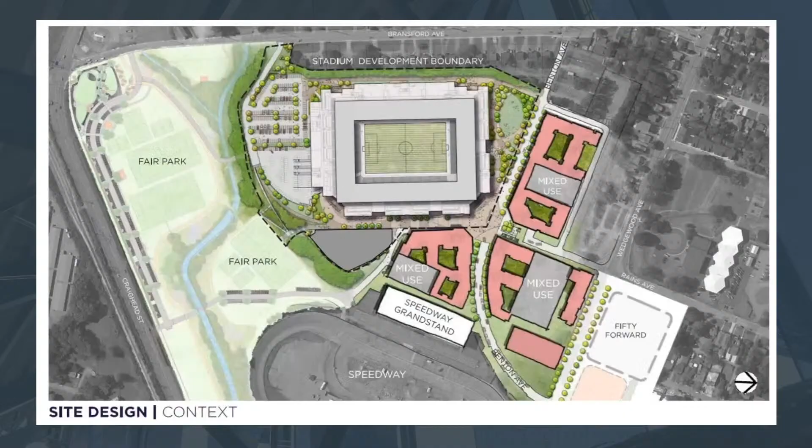Go to the next slide. So we're kind of turning directions here on you. That previous slide, north was up, so sorry for that. So north in this image is to your right. So downtown will be to your right in this image. So this is a closer in look at the project site. The project itself is located in the Fairgrounds Nashville area. This whole area has got a redevelopment plan that the stadium was a big part of.

The first phase of the project was the stadium. It sat on the grounds of some of the existing fairgrounds show buildings, exhibit buildings, and that kind of thing, and they were in desperate need to be replaced and redone. So this area was completely demolished, and the stadium was built on the site of that area.

As you can see around this area, there's other development going on, and the stadium serves as a catalyst for this development. There's mixed use development on the east side of the stadium between the Speedway and the stadium that is currently under construction. And then to the north, you'll see some additional mixed use development that will be developed in the near future.

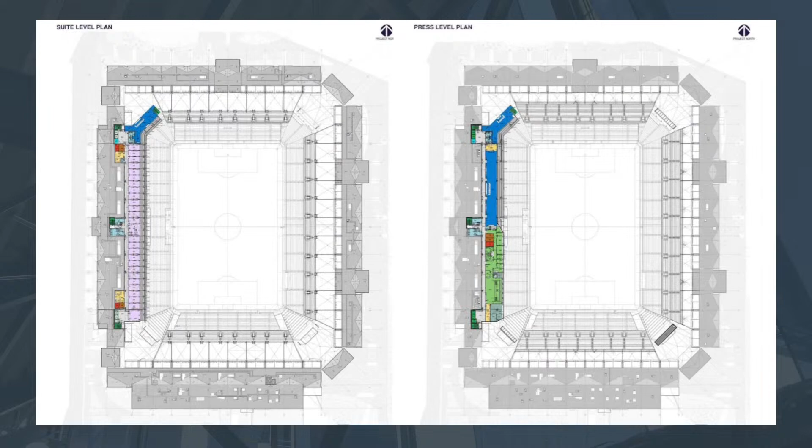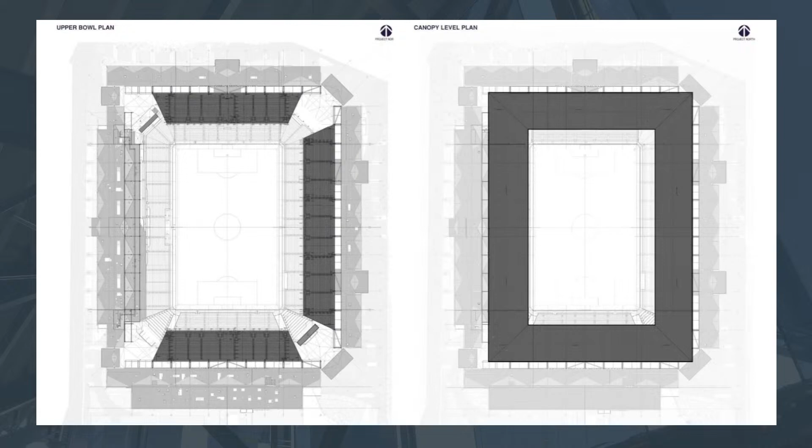And then the upper bowl plan, you can see how the upper bowl encompasses the north, east, and south sides of the field. And then the canopy level to the right, we have a canopy that circles 360. If I remember right, Justin, correct me if I'm wrong, I think that's over an 80-foot span on that canopy. Yeah, we're about 85 feet from the back of the bowl out, so it covers the entire upper bowl and a decent portion of the lower bowl as well.

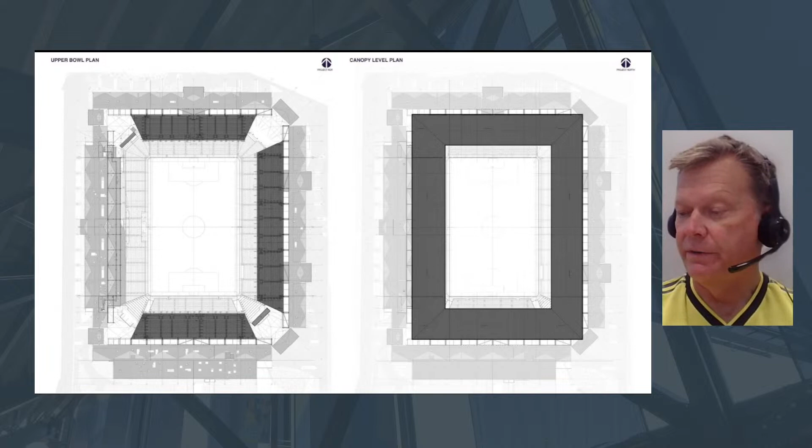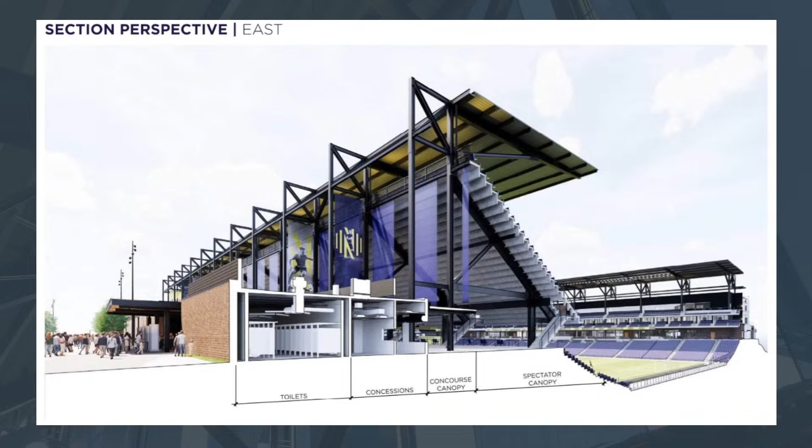Yeah. Some quick facts and figures. Opening day, May 1st. Project cost was about $285 million. Gross square footage for the building's right around 544,000 square feet. About 30,000 seats total. And the site acreage is about 19 acres. These next 3 slides that we're going to show you, I think, are very interesting and an important dovetail into our subject matter today. It gets into a little more detail.

So what we're seeing here is a section perspective of the east sideline, and what it does is it shows you a little more diagrammatically how the building goes together. You can see these outbuildings where the concessions and restrooms are basically simple buildings, all load-bearing masonry walls with bar joists. The main structure, as you can see, the tall verticality, we expose and express the structure. And this is a common thing for stadia design because it's kind of a magnitude of scale issue.

As these buildings get very large, sometimes we're just not fortunate enough to have the budget to completely wrap the exterior facade of these buildings. And so we express the structure, and it's part of the architecture. It's very important that as we get into our discussion today, you'll see the importance of what we want to talk about with steel design.

But going to this a little bit further, you can see that the upper bowl is all supported by the steel structure; the upper bowl is all precast. And then the canopy, as you can see above that, is all steel frame and steel deck and a single-ply membrane on top of that. Go to the next slide.

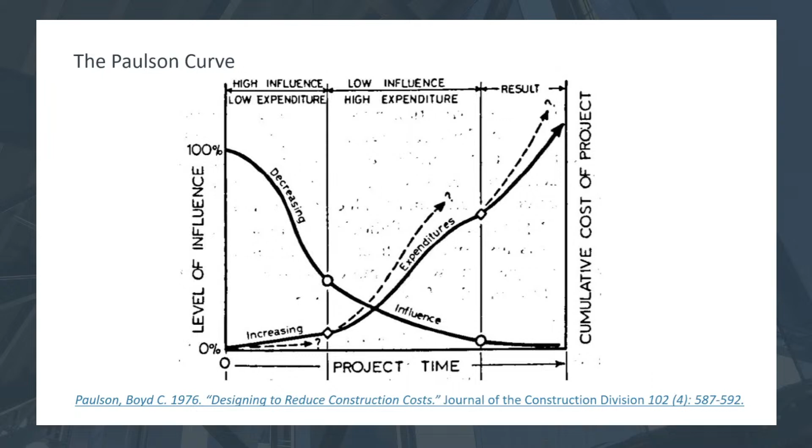So this was from 1976. Again, the same thing would apply to structural steel, going in that same manner. And really once those influence lines cross, that's the juxtaposition point. And really the project can go a variety of ways at that point. And the breadth of that cone really represents what we would refer to as the project risk profile for the owner. Things could go well, things could not go well. But again, we don't have as much influence over those factors as we do early on in the project.

So then thinking about that, is there a way to reduce that risk profile, to narrow that cone? And so in taking our influence line and pushing that forward, where we're actually going to spend a little bit more influence early on and pushing that out further into the project lifecycle, we can see that that's going to result in a narrowed cone. So overall, we're just trying to improve the influence curve to reduce the overall cost and schedule risk. And so, Taylor, you want to explain a little bit specifically about steel?

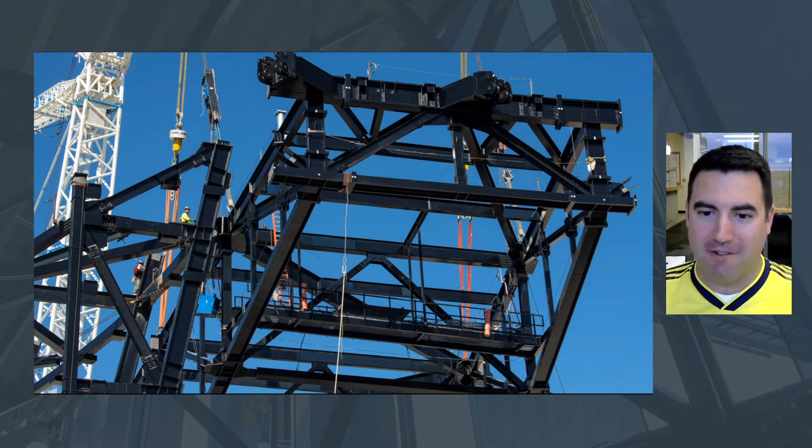Yeah. So, a couple pictures we'll walk through to support some of our descriptions. But historically, especially on sports projects, steel can be the single largest trade partner contract we have. It also comes with some of the highest risk, and a lot of that revolves around a few key components. One is simply the scale of the work and the fact that it lies on the critical path for the entire duration it takes place. So that's one key factor.

The other is really, to Bruce's point, steel structures have evolved. They're now just as much an architectural element of the building. They're no longer simply a supporting structural element. And so because of that, structures have become much more unique and ornate. It's incredible, but it comes with a challenge. And so the next image here helps to describe where the risk lies. The risk in steel typically doesn't lie within the body of the steel member. It lies at the connections, the last 5 or 10% of that steel member is really where the risk and the potential for a challenge exists.

And so with our project team here, our goal was how can we, to Justin's point, move some of these decisions and influence earlier on in the project and allow us to reduce the risk later on. We'll walk through how we actually brought this to fruition. And then towards the end, we'll drop through what worked and why we saw the success. But really, it was about managing risk for Mortenson, Messer, the owner, as well as the design team, and making those decisions early on.

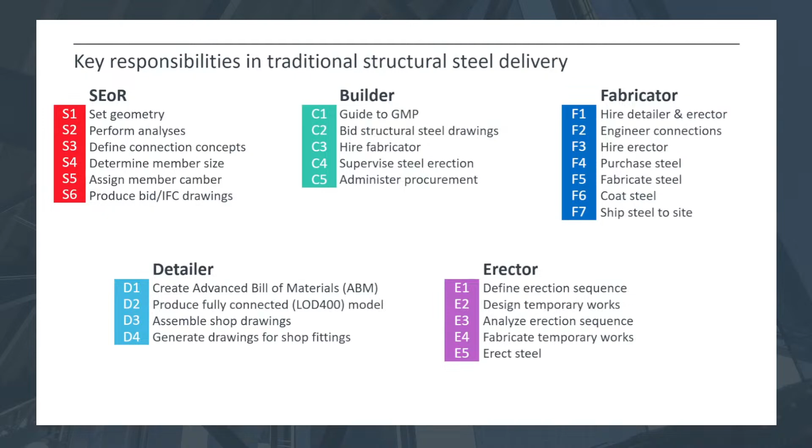Yeah, and one of the unique things about structural steel is that there's a lot of people and a lot of firms involved to get to that point where we're actually erecting steel on site. And the process is we have to create what's called an advanced bill of material. Every piece of steel is rolled in a factory and then shipped out to the project fabricator's warehouse to be able to start that fabrication process. But in order to create that advanced bill of material, it creates a lot of pull requests upstream. There has to be a detailer involved to help create that advanced bill of material.

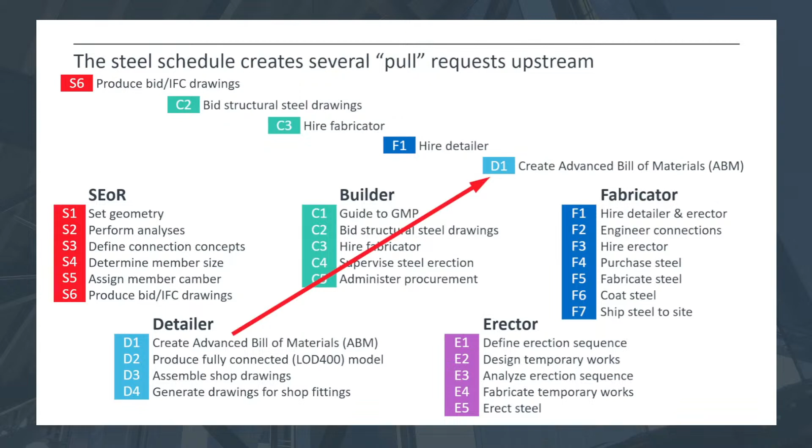That detailer traditionally has always worked underneath the fabricator scope. In order to have a fabricator on board, you have to bid. They have to be brought on board in some sort of environment, usually in a bid environment. And then in order to have a set of structural drawings to bid, the design team has to produce those, all to create that early mill order package for the project. So because of that, the need to start detailing created several of those things that happened early.

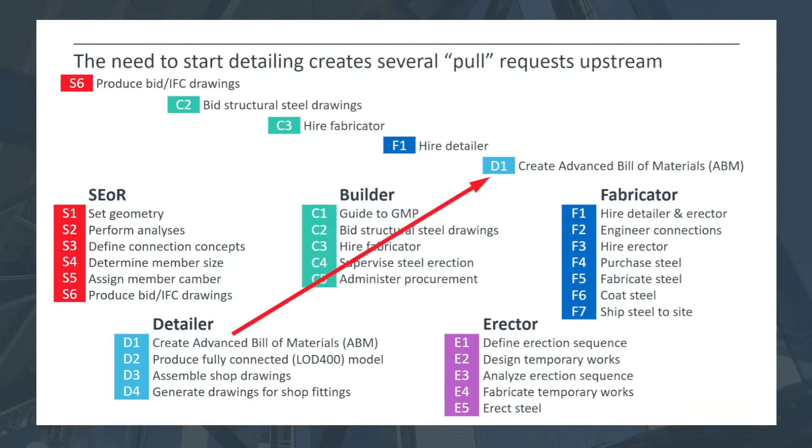So as we were talking and working through this, and have looked at it on multiple projects, is there a better way to do it? Is there a better way to reformat that? So instead of waiting for everything to be dependent, is there a way to hire the detailer earlier? Is there a way to engineer those connections, as Taylor said, the big risky parts of the project?

Can those get brought on board and figured out sooner? That then can be used to create an advanced bill of materials and then to produce structural drawings and bid the package out and then hire the fabricator. So is there just a way to reformat what we were going to do? Great.

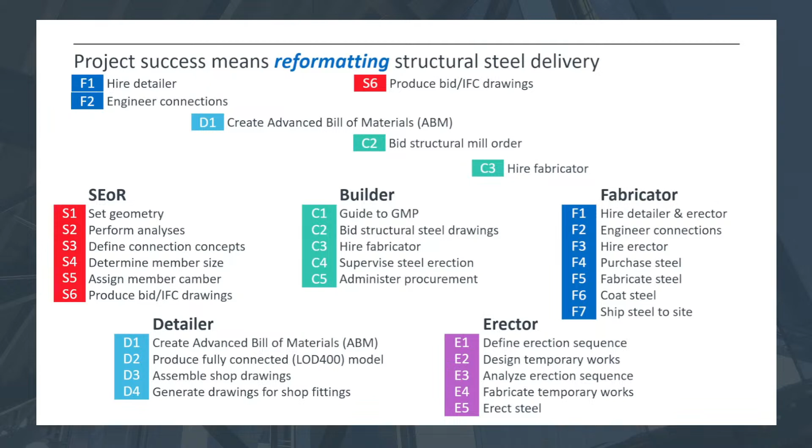So in response to all of those trends, what was done differently on GEODIS Park? Taylor, you want to talk a little bit about this? Yeah, sure. So our typical method is what we're showing here, right? A traditional method is basically our steel fabricator. They own the detailer below them. To Justin's point, we effectively make a selection, and then that effort takes place post fabricator being selected.

Here we flipped the script a little bit, and so our integrated approach, which really revolves around collaboration and having an intentional plan from the beginning, was to simply take some of these associated costs that would typically live below the fabricator and move those dollars forward. Working with CAA Icon and the team to have a collaborative approach and get alignment to do this was key to the success. But we were able to pull some of these dollars forward.

So the connection design was completed through Walter P. Moore. And then Mortenson, we actually hired MXE directly to generate the LOD 400 model. And making these shifts of taking the money from where it would typically have existed earlier on in the process allowed us to reduce risk on the project and then in turn have a very successful buyout process as well.

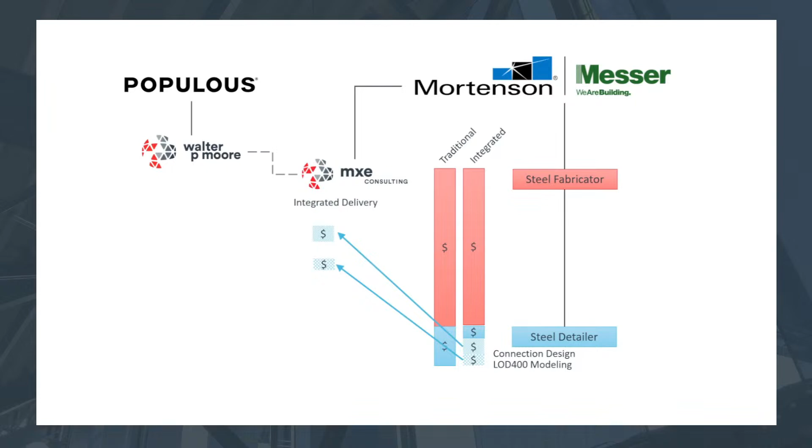And I think there's an important distinction to be made here that those are dollars that are just pulled forward. They aren't additional dollars, and it's a function of when, not if, they're going to be spent. Exactly. Right. Great clarification.

So we're going to go through some technical terms here, talking about level of development. This is from the BIMForum document. These are standard industry terms, level of development 300 and level of development 400, and what that really means for a project in terms of actually getting stuff done. Again, these are from the BIMForum document.

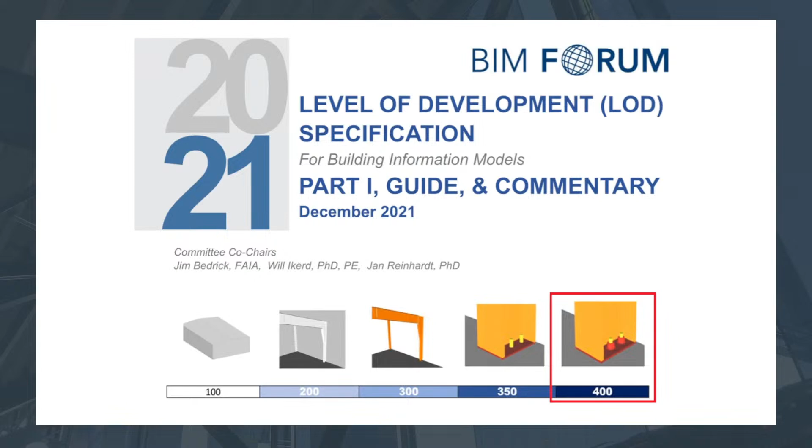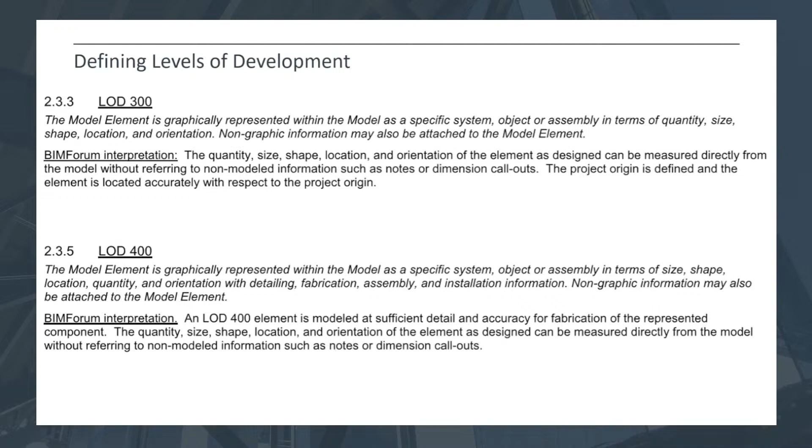LOD 300 is sometimes referred to as a stick model. You can see it's basically every model element graphically represented in terms of quantity, size, shape, location, and orientation. So a lot of times because of that, it's referred to as a stick model. Again, it has every piece of steel, the correct member size, the correct orientation, the correct length, so that a fabricator from that can produce a mill order.

So an LOD 300 model is used for a mill order; that's what we need to order each stick of steel on the project. But the LOD 400 for fabrication is a big jump forward. The amount of information included in that LOD 400 model is an order of a factor of 10 more than what you would see in just the LOD 300 model.

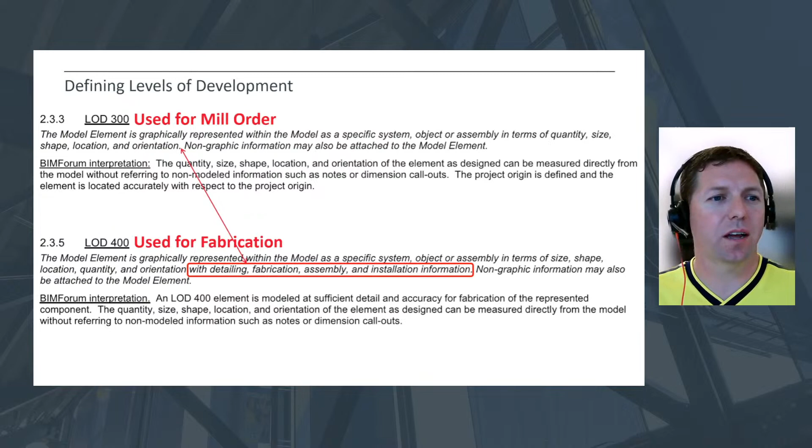So what gave us the confidence that we could actually pull this off? Because I will be honest, when we first talked about this, and then ultimately when we delivered that first model, I was as nervous as I've been on any single project, because we are saying that all this is here and it is ready for the fabricator, in our case Lejeune, to really start to blow and go on the production of this.

One thing to add on to that, Justin, if I may, is the LOD 400 model that's generated is non-shop specific. Yep. And I think that's a key fact too: it's created in a fashion where any fabricator can use it. They simply need to take the model, make it specific to their floor and the equipment they're using, and they're ready to start fabrication. And so it streamlines the process significantly.

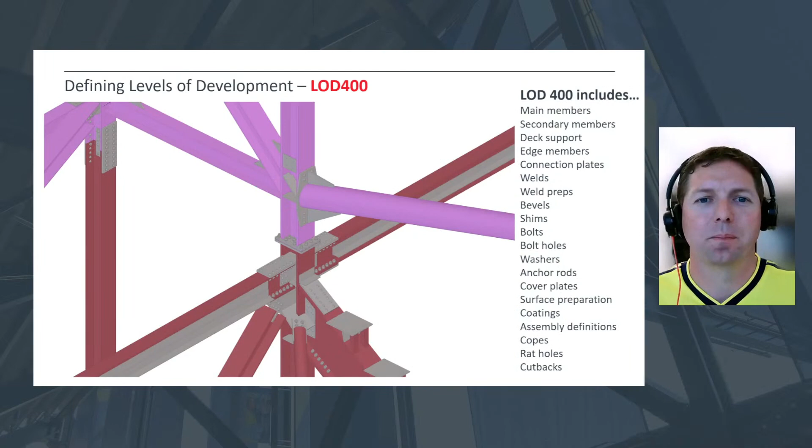Yeah, you're good. So, inspiration for why we did this: as you can tell, there's some excitement around it, but I dropped the word collaboration before, and the biggest key to making something like this happen is truly having team alignment on what we're trying to achieve. Populous, Mortenson, and Walter P Moore all worked together on Minnesota United, Allianz Field, the stadium you're seeing here. And this was the first baby step into where we wound up for Nashville.

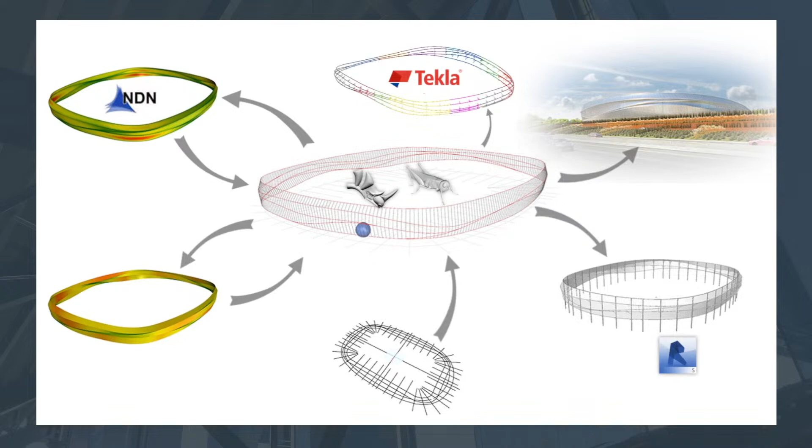The tubes that wrap around the facade there behind the PTFE, we call them driver tubes, but thousands of lineal feet of radius steel pipe is what was the structure behind it. And this was our first stab at an LOD 300 cloud shared model between the design team, Mortenson, and our selected fabricator on the project. And Justin, I don't know if you want to elaborate, but this was what broke the mold, truly an integrated team approach in eliminating some of the 2D document review.

Yeah, like Taylor said, we had thousands of lineal feet of this driver pipe going around the building at Allianz Field. It was undulating. Each pipe had a radius to it, and start and end points were different for everything. And as we were going through this, trying to document this on a 2D set of drawings, we were able to do it, but then how was the steel fabricator's detailer going to have to build off of that again?

And so we were talking, and it's like, well, we have this information in 3D already. We have this central cloud-based data file that has all the complex geometry information. We could then push that to Tekla with all that exact model geometry precise. Don't have to worry about it. No questions asked. And so we were able to do that and push it directly into Tekla for the fabricator.

So as the fabricator was going through that, rather than them trying to create curves and radius points and XYZ coordinates of each single driver pipe, it was all there. They were able to bring it into the rest of the model they had coming in. So it saved them a substantial amount of time, and it gave the whole project team the confidence to know that the geometry was right, that we had this incredibly complex geometry, but it was 100% right for the project team.

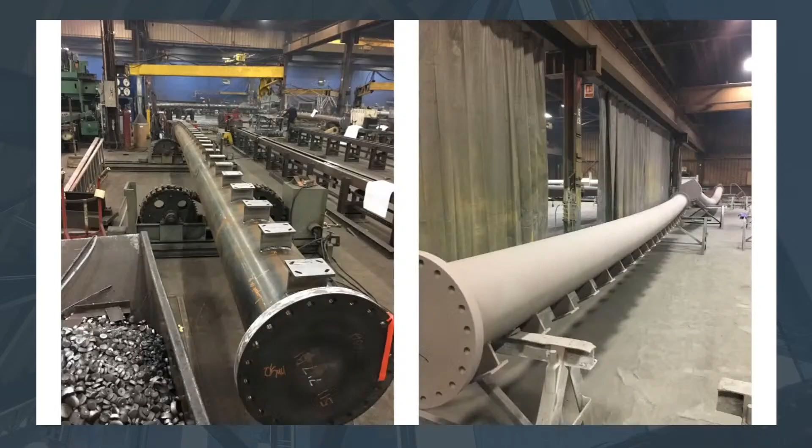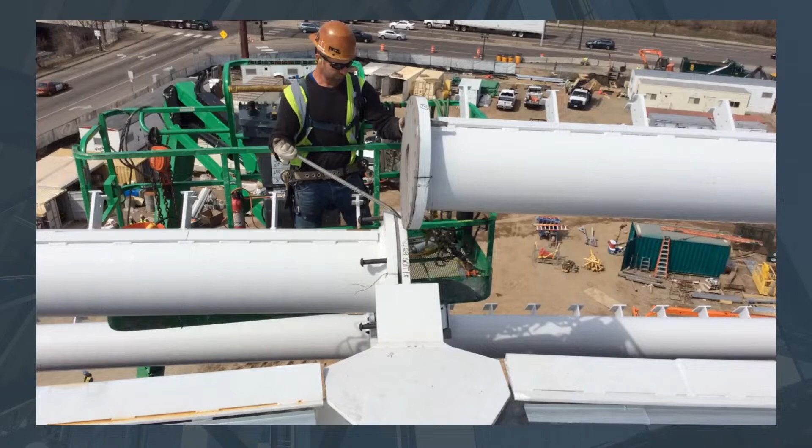And so here's a couple views of the shop. I like the picture on the right because it really shows how much radius we have on the driver pipe that's going through there. And then actually as it got built up in the field, Taylor was reminding me that every single one of these pipes got fit up fine, that we didn't have any issues with fit up during the erection process. And then you can see ultimately, it produced a great design, great collaborative design for that process.

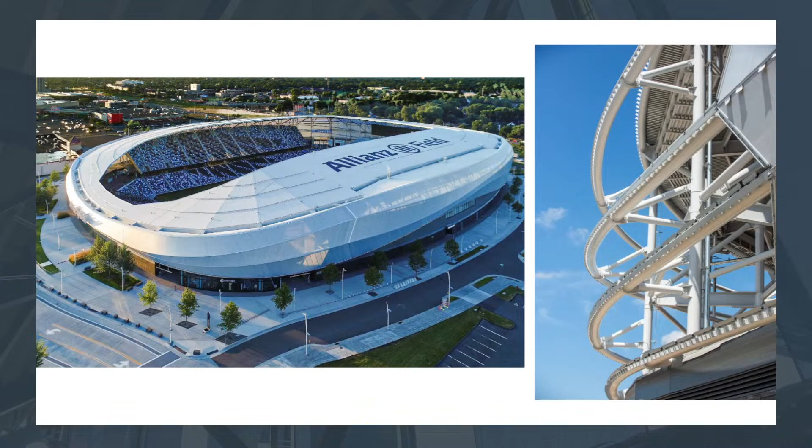It's worth noting too, there were some concerns on how we were going to survey and install all the steel to allow the successor work to take place. And to Justin's point, every steel member fit. Nothing got sent back to the shop for refabrication, and there's not a single expansion joint within that system. It's pretty amazing what actually took place, and that's kind of what gave us the momentum to segue on to taking this to the next level.

Yeah, and also along with that, there was another soccer stadium project down in Austin for their expansion franchise where a different office of Walter P. Moore was engaged, and CAA Icon was also engaged again as the owner's rep on that project. This project was about a year ahead of the Nashville project, and because of real schedule constraints, that project had opted for a similar model where Walter P. Moore and MXC was producing the Tekla model in that process.

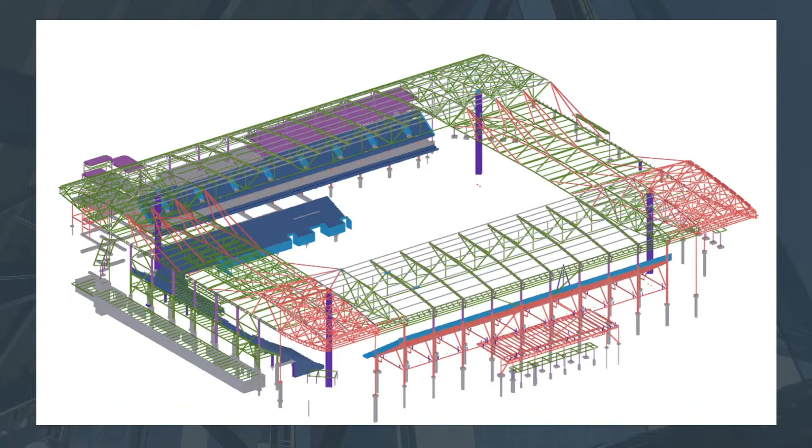And so I think, Brent, I don't want to speak for you guys, but I think that kind of helped give CAA Icon the opportunity and confidence to push it forward on this project as well. Yeah, anytime you can move things from anecdotal to substantive, we've touched on this before, and we think there are additional strides and advancements to be made in something that worked. That certainly makes it easier to sell.

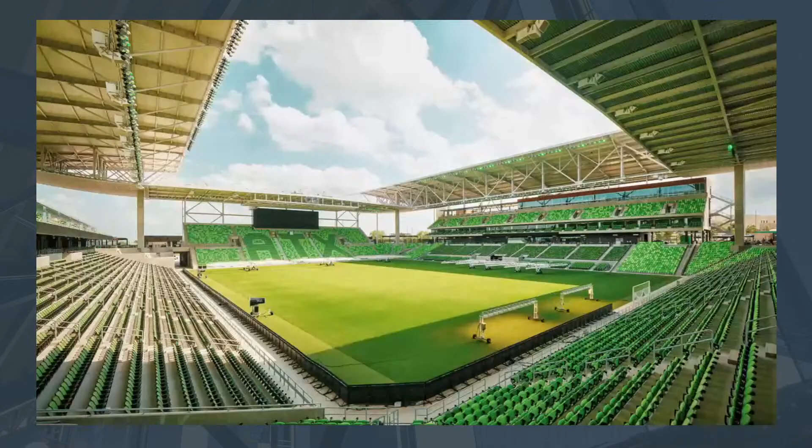All right, so moving into how did this work, Taylor, from a schedule standpoint? It's a great question. I think one item that isn't pointed out in here that's worth talking about for our integrated approach is we actually started to have these conversations in April of 2019, and we were meeting with Populous, Walter P. Moore, and CAA Icon on how can we truly take this to the next step and what's the plan we need to implement. And so being extremely intentional about being unique and trying to reduce risk doesn't just happen, right? It needs to be thought through and planned out well in advance.

So the top schedule is just a typical steel delivery schedule. What we wanted to highlight is you run a steel bid package. We'd have proposals turned in 3 to 4 weeks after, take a couple of weeks to a month by the time we actually make a selection and get a contract signed. We get 100% CDs out and ensure that the documents are completely ready. And at that point, they're creating their own model, right, to an LOD 400 capability. They're starting shop drawings. They're getting their mill order going. They're trying to figure out where all the high performance coatings are.

There's a significant amount of work that goes into it, and it can take 7 to 8 months from when they're brought on board to when they're actually starting steel on site, which can be a constraint sometimes for the project. And so how we ended up delivering the project is shown below in blue, but really the connection design started well in advance, right? That was actually being completed by Walter P. Moore. We had 100% CDs delivered after that.

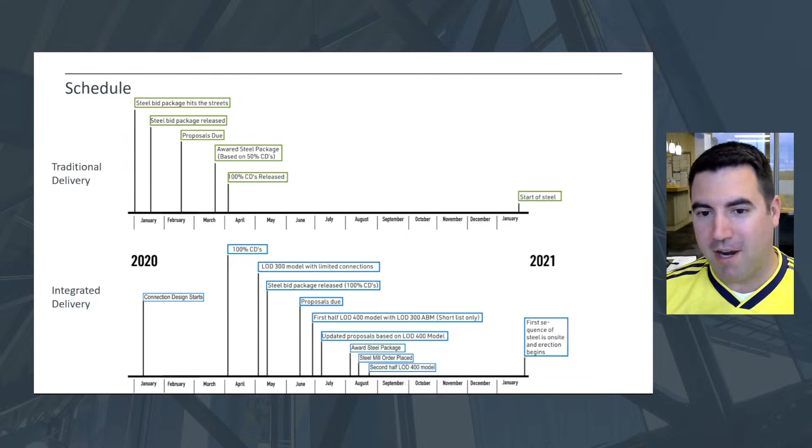And I think that the first month after selecting a contractor is a huge timeline to set up success and how the project is actually going to go. And it was very thoughtful, smooth, and revolved around teamwork and communication. And that just carried on throughout the duration of the project.

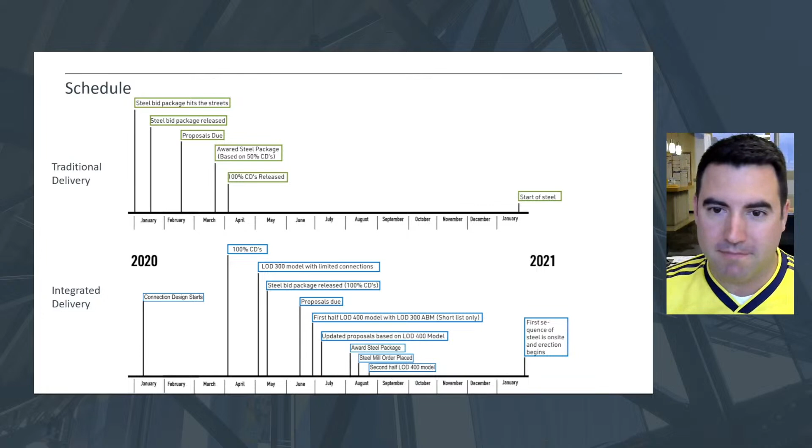Yeah, and I think that communication, by being able to push that out, rather than awarding the steel package based on 50% CDs, but instead being able to award that steel package after 100% CDs. I know for my side, working with Bruce and the Populous Hastings teams, it allowed us to coordinate a lot more of these connection details and just final things that happen towards the end of a project. Elevator shaft size changes, or we have to adjust a cladding edge detail as something wasn't quite figured out at 50% CDs, but then we figured out, okay, this is what needs to happen for that. So Bruce, do you have any other comments from that design standpoint side of that design extension?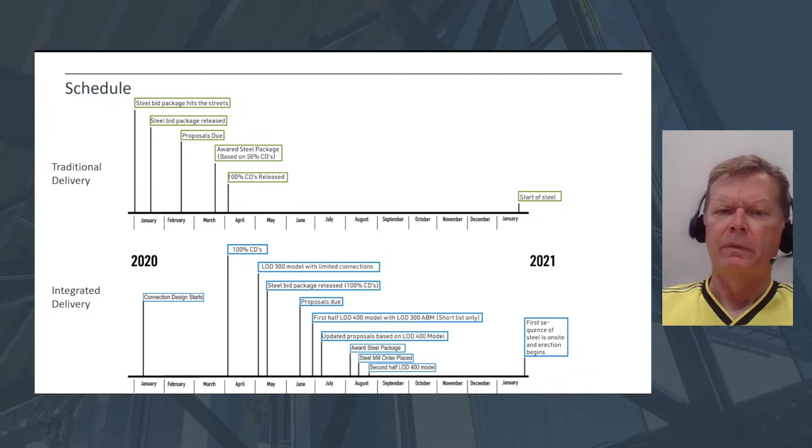Yeah, I completely agree. Any additional time we can get to coordinate is a bonus in my mind, because the schedules are so reduced to begin with. One thing that really comes to mind is how these buildings are changing. Just the amount of technology that's going into these buildings for Wi-Fi, DAS, the miles and miles of conduit and things that have to get coordinated, and this gave us an opportunity, I think, is one item that comes to mind, and I think we'll dive into some of those images later, right, Justin? Yeah, we got those going on. But that definitely gave us some time to work and get some of those details ironed out. Yeah, it certainly makes it more intentional as opposed to an afterthought for a lot of the follow-on work as well.

Yeah, and the other thing to point out is that, even though the connection design started officially in January, we had already started having some initial concept back even in early design development in late 2019. But again, by having our Walter P. Moore team do all the member design and the connection design, we're able to overlap that quite a bit in terms of knowing that a lot of the typical floor framing was already figured out by about February. We could start doing beam to column connections, beam to beam connections, and start working through even some of the more complicated, complex connections that were going to be repetitive across the building.

We could still get that buttoned up and started in February and March, while other parts of our structural team were coordinating cladding details and other things of that nature. So that really enabled us to have a really strong set of drawings, and like Taylor said, having that model right away from the beginning when it first went out to bid, as part of the process.

Something else to add on to here is, for once, we didn't have to battle what's structural and what's misc metals. If it was in the model and it was shown clearly, the structural steel fabricator owned it. If it wasn't in there, our miscellaneous metals contractor had it, or somebody else specifically in their scope. And I think it's one of those scopes that's just a headache for us and can present challenges. And at least for Bruce and Justin, from what I heard, it was quite straightforward for a change, which was great.

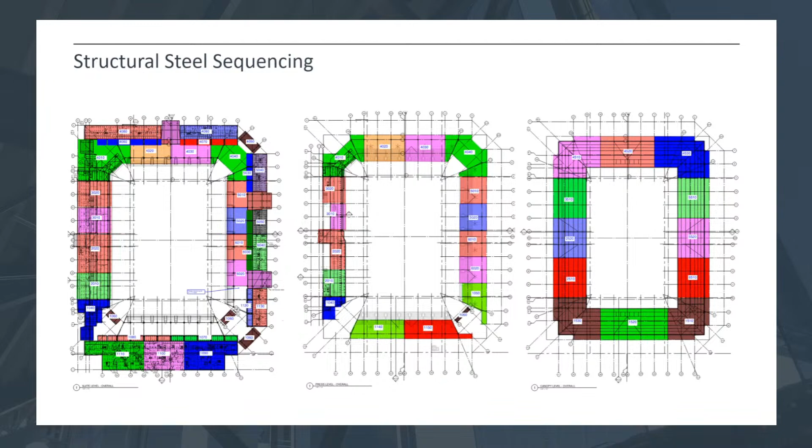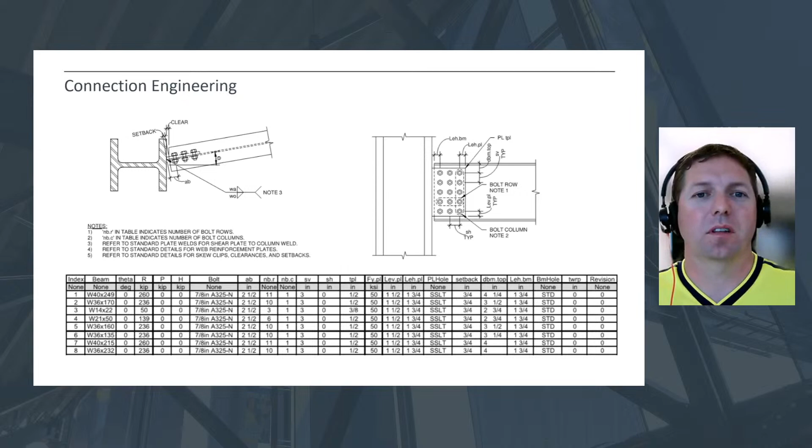And just to dive a little bit deeper into the connection engineering side of it, for folks that are out in California or on the West Coast, typically it's the responsibility of the structural engineer to design and detail all those connections, typically from their high seismic requirements. That's not how it's done here in Central Tennessee or most of the eastern part of the country. So these are the connection details that our team was developing, every single beam to beam connection, every beam to column connection, brace connections coming through there.

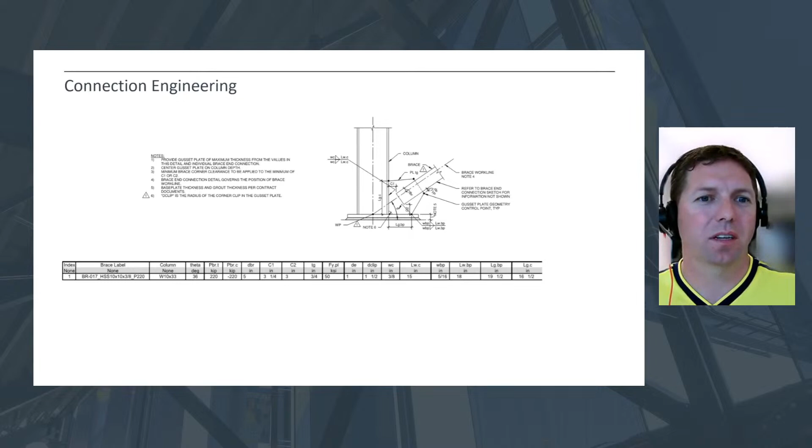So again, that's a lot of the work that can be ongoing, and instead of pushing that all off onto the steel fabricator and their detailer, we could have that happening simultaneously to the rest of the design. But then we really get into these complex connections, as Taylor was talking about. If you remember that picture he showed earlier, these are the risky spots of the project that can cause delays and a lot of the unknowns, right?

In terms of, well, how big is this gusset plate? Is it 1 inch thick? Is it 2 inches thick? How much weld do we have to have? Is it a CJP weld? Is it a fillet weld?

And so we had these in a Tekla model, but we also produced these 2D representations as part of the bid set, so a fabricator could look at PDFs as they were preparing their bid, but also could go to the model and extract these quantities right away. So it gave both sides a way to have that happen.

And also, from a design standpoint, it let my team work with Bruce's team to figure out, okay, what does the design aesthetic of these connections want to be? Does it want to be a large gusset plate? Do we want to have gusset plates that come in off the side? Do we want to have cap plates? What do those want to be?

I forget, Bruce, if you remember. I felt like we went back and forth probably half a dozen times going through these connection concepts during the design phase. Right, to be able to have that interaction in a team approach was huge.

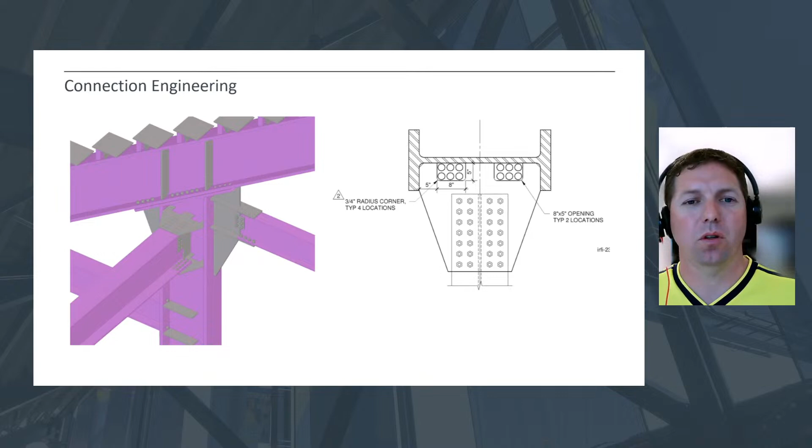Yeah, and then as Bruce mentioned, the amount of technology that's going into these buildings is so much more, even just than 10 years ago, let alone 30 years ago. And so being able to figure out how are we going to route all these utilities going around the building, and as Brent mentioned, in a thoughtful manner.

So what we actually did here was, we knew that there was going to be some conduit running up here for speakers, for Wi-Fi, for DAS, for concourse TVs, actually creating some pathways for those that again are intentional in the process to allow space. We don't know exactly what's going to be in here, but we've now given them a path to be able to go through for that.

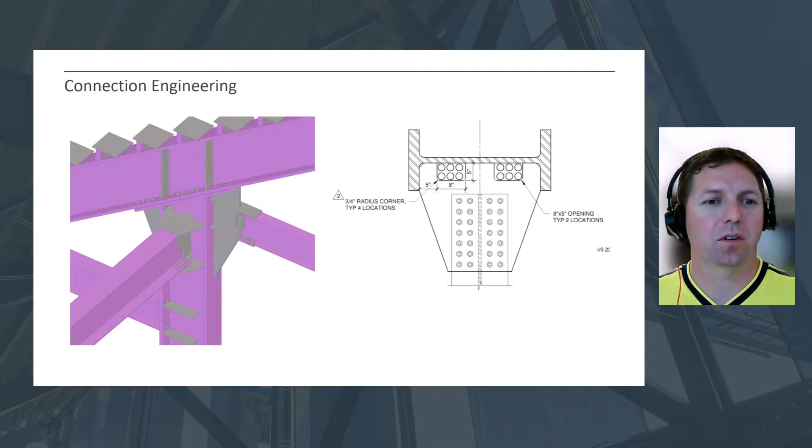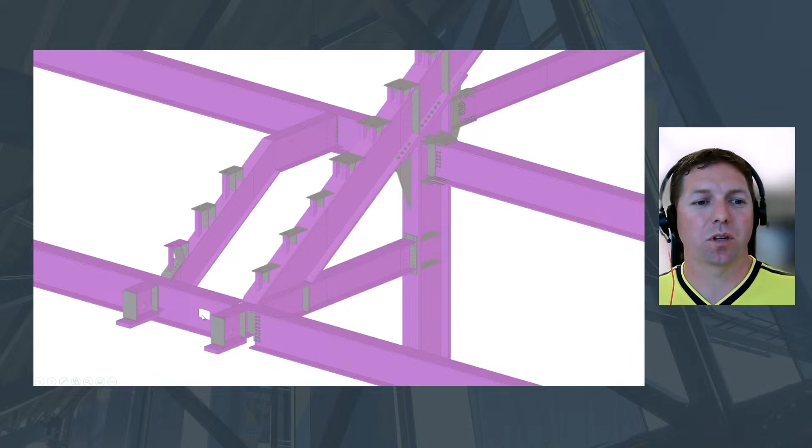And similarly, and again, these are all shots from the LOD 400 model that was ultimately delivered to the fabricator. We stopped some stiffeners short so that the conduit could run up behind. And then here at the front of the bowl, we added a couple holes coming out of those two beams and then going back here so that the drain pipe from the precast could be routed through those as opposed to having to be routed underneath those.

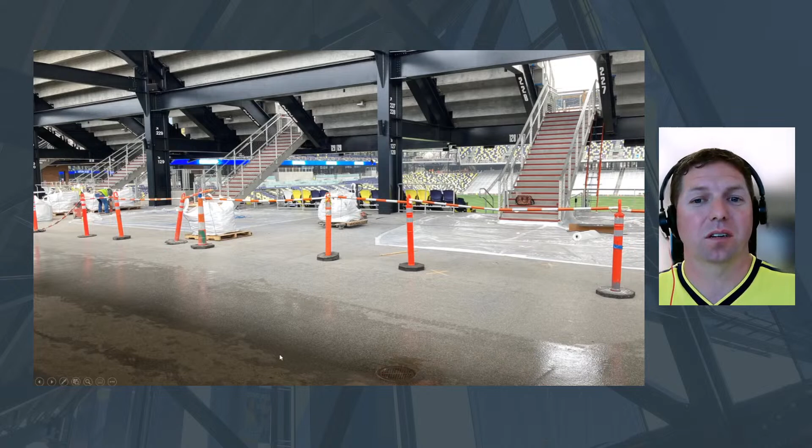And so when you look at what actually got built, the drain pipe's already installed here. You can't even really see it. So as you're walking through the concourse, you're not able to really see that. It creates a really clean visual line going through the spaces. If you zoom in underneath, now you can see the black drain pipe that's in front of the beam.

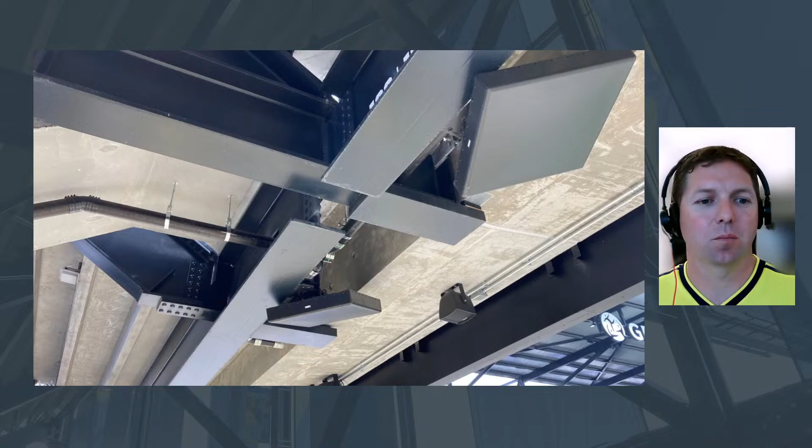That again, going back to pushing that influence curve up, spending more time and effort early before this gets out to the field or before it's ready to be fabricated, and you get an RFI saying, how big does this hole need to be, or where does this hole need to be? We're able to do it thoughtfully and intentionally. And then you can see another finished shot here of that same column going up through there.

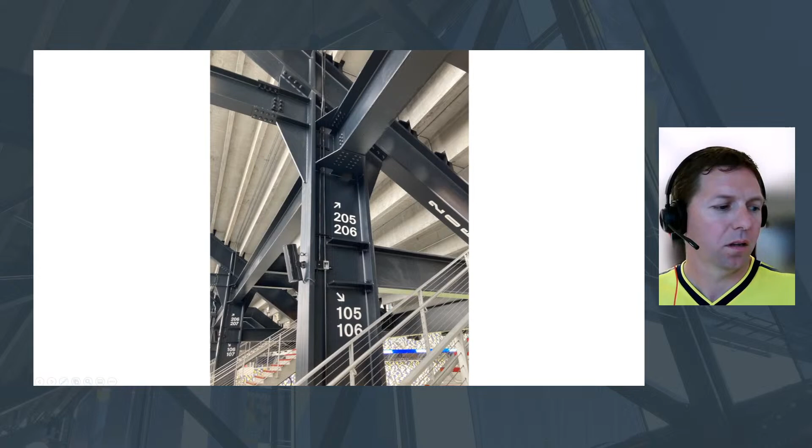So Bruce, you want to touch a little bit on coatings? Yeah, this is another great tool. I call it a tool because it really is, to be able to have a collaborative approach. I remember some of the specific coordination meetings we had, talking with some of our team members, how beneficial this was to be able to just walk through the model with the whole team and make decisions on the spot. Instead of the old approach of shop drawings being sent and passed around 2 or 3 times, this is so much more efficient in the use of people's time.

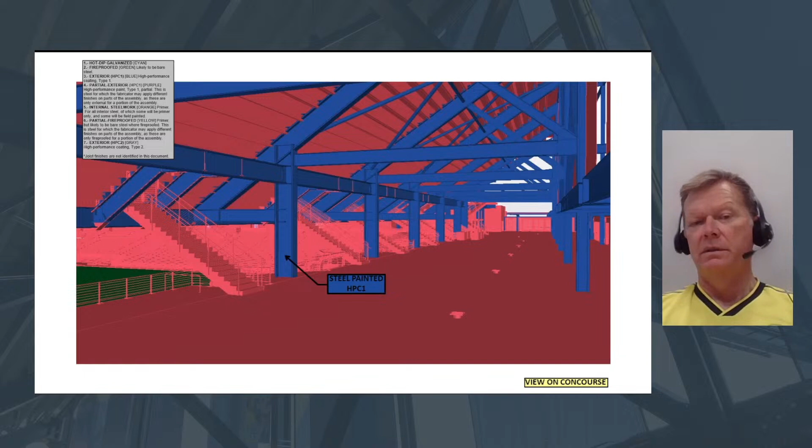Yeah, and Taylor, you want to talk a little bit about what it was for you from your buyout perspective? For sure. I mentioned before, but high performance coatings, especially on our sports projects that are open air, right? There's an incredible amount of steel that gets coated. And typically, right, Bruce, there's a finish drawing in the architectural sheets that helps to indicate where high performance coating should be, and we can identify where fireproofing is, what's raw, et cetera. Right. There always are challenges with identifying all that on a 2D drawing and ensuring it's accurately communicated. It's just the nature of the industry.

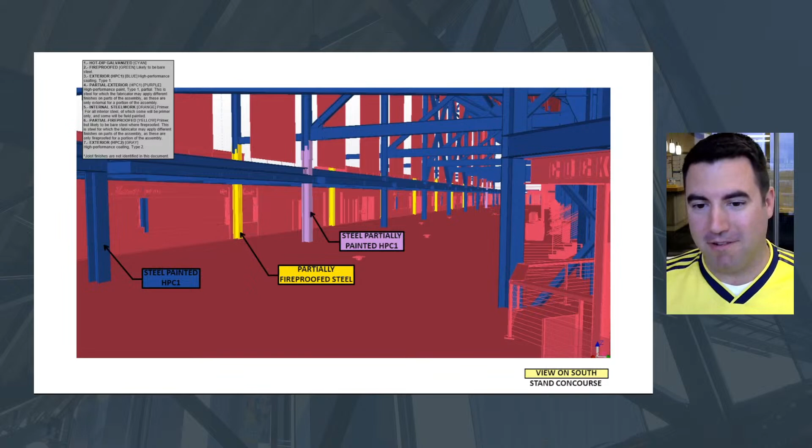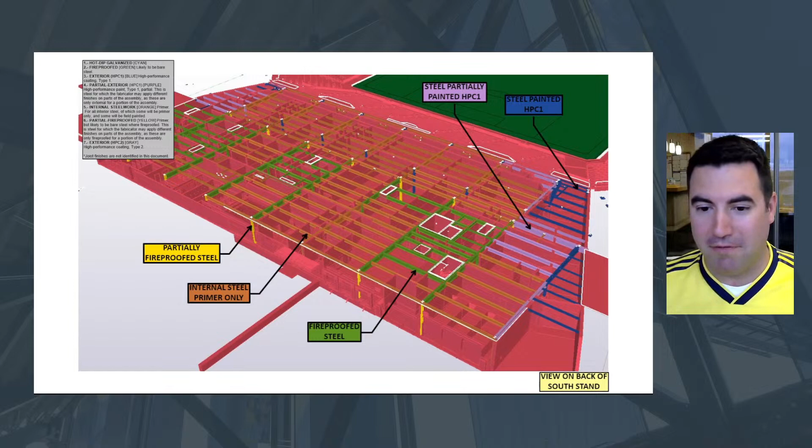And so it was actually an afterthought partway through to say, can we add in paint? And the answer we all said was, yeah, that'll be pretty easy. So we added in all the finish. So what's the finish of every steel member supposed to be throughout the project? Which is something we always spend a lot of time on during buyout, is how much high performance coatings do you have? And the disparity between proposers can be drastic on a job, and everyone's looking at the same set of documents. With this, it was, once again, to Justin's point, crystal clear and cut and dry what finish went on what member. And we had little to no follow-up on the extent of high performance coatings or battles on the incorrect finish.

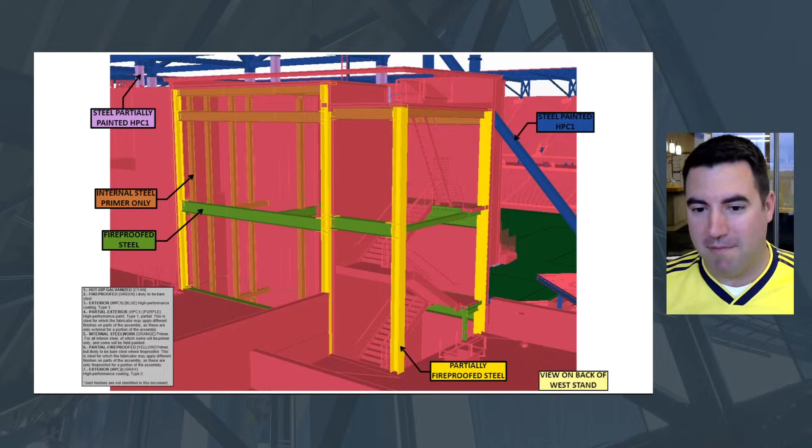So I think this was something that was a drop in the bucket, but made a massive impact on planning and execution. And that was kind of unintended, right? That wasn't something you were anticipating as a benefit from the lead into this. It was more just a byproduct. Yeah, it was a thought halfway through on, gosh, this would be awesome if we could include this. And I think everyone said, well, that won't be that bad. We're starting to have the discussions right now anyway. So I think just having, once again, the trust and open communication and willingness to ask what's possible allowed us to do things differently.

I just may deviate just a little bit here, but one of the things when I joined the project that I was struck with was the level of trust and collaboration that the team members already had. And we know that isn't always common in this industry. But I think it had its roots in some of this process here. So again, just another unintended consequence. Yeah, agreed.

Agreed. What about one more unintended consequence, Taylor, on anchor rods? Yeah, so one of the challenges with shortening your procurement, or essentially pushing the buyout date out, because we can get steel at a quicker rate and we're more efficient, was we didn't have time. In one of our coordination meetings, this was December of 2019, I think, we'd said our fabricator won't be able to create shop drawings for anchor rods and embeds.

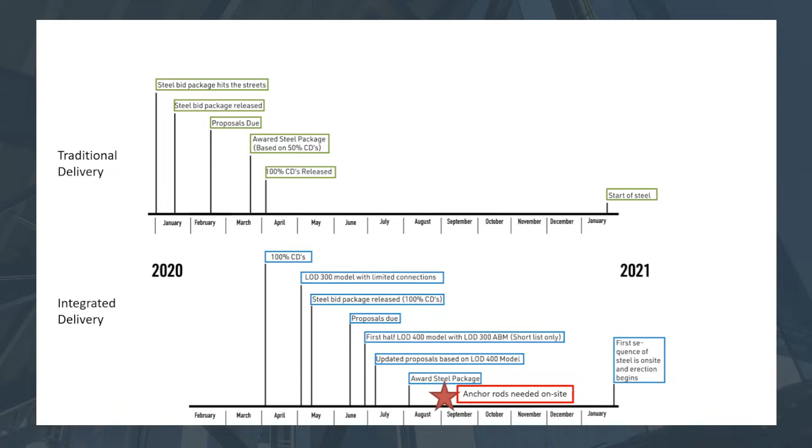And so MXE ended up creating all the shop drawings for any embed that's cast into a concrete element, as well as the detailed shop drawings for all the anchor bolts, which was fantastic. We were able to get those on site in time. We could have our coordination meetings and get them installed with, I think, Justin, quite few issues from the installation side as well. Correct. Yeah.

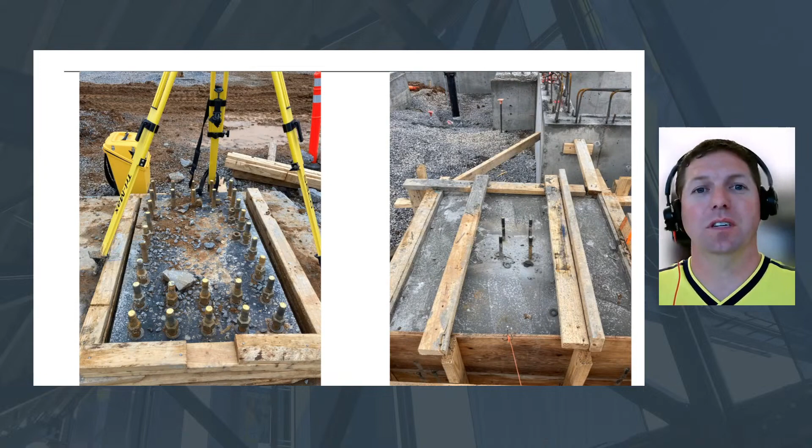And I remember Lejeune Steel, when we were talking to them about what went well and what didn't, they mentioned that anchor rods for them is always one of the first things. They get hired, and two days later the superintendent in the field's asking, where are the anchor rods? And so it onboarded them in a smooth way. It provided them a really good on-ramp to say, this is already done. The shops are approved. You just need to fabricate it, as opposed to going through the whole submittal process.

First, they have to create a shop drawing, that shop drawing has to be submitted, then we review it, and then, oh, actually, they misinterpreted this part of the drawing, or this has changed from the first drawing set to what it's at now. And again, being able to incorporate all of that in the model and in that initial process just led to a super, super good start for them in the job.

And especially on these large sports jobs, particularly anchor rods, it's not everything's just this little 2x2 small column. We end up with some pretty substantial anchor rods and layout patterns. So it's not a trivial matter to get those in and coordinated.

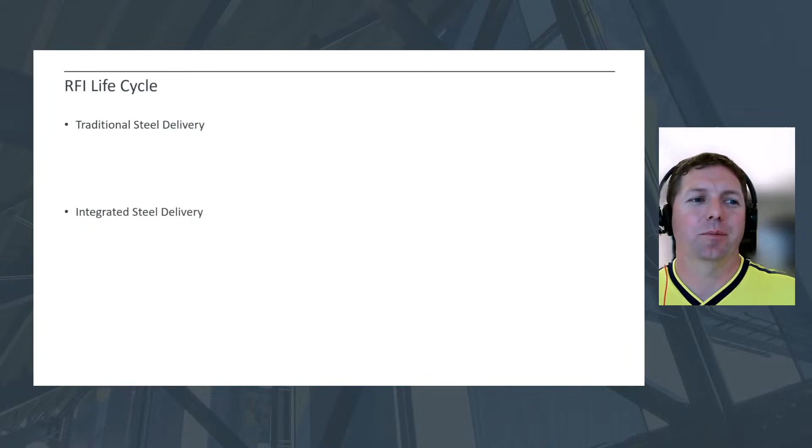One other item that I wasn't expecting was the RFI process. In a traditional steel delivery, a detailer creates a question that goes to the steel fabricator, then to the construction management team, then gets uploaded to the architect, who passes it along to my structural engineering team. We review it, and then it goes back to the architect, the construction manager, the steel fabricator, and down to the detailer. If everybody's seen one of those, there's 8 cover sheets to the RFI before you even get to the question.

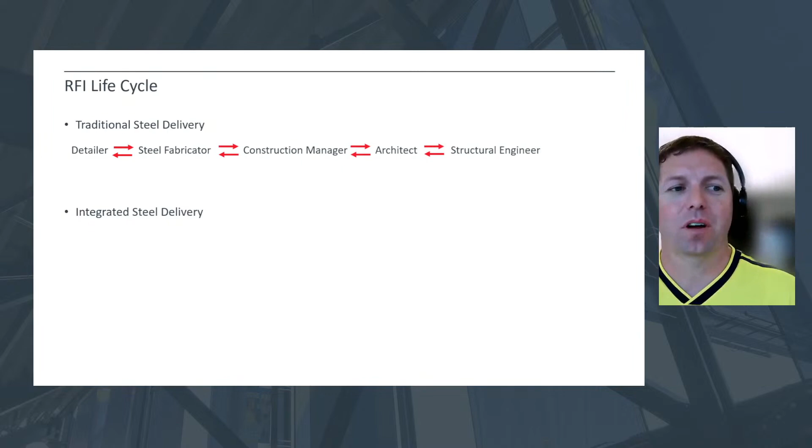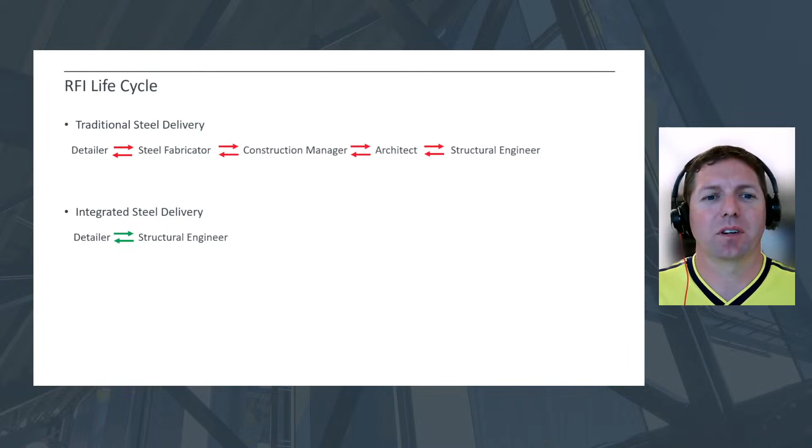And so here in the integrated approach, the detailer was able to go straight to the structural engineering team. We would discuss it and get the answer back right away, even before the project had gone out. It was a much simpler, smoother process, and eliminated some of the mind-numbing, time-consuming aspects of the project. Like Bruce and Brent were saying, it really helped create a much more team atmosphere; when things came up, everybody felt like they were outside their silos a little bit more, and a lot more collaborative.

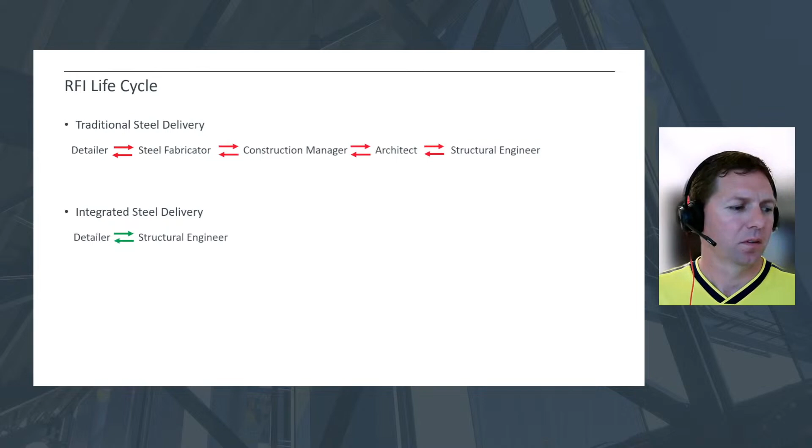So big question, Brent, was it worth it? Yeah, was it worth it? So kind of just a reminder of what we were trying to do was reduce the risk of the project, schedule risk and cost risk, by pushing that influence curve up, and we did it by pulling out the connection design and the LOD 400 modeling ahead of time. The owner made that investment early on in the project, and I'll let Taylor take it away from here.

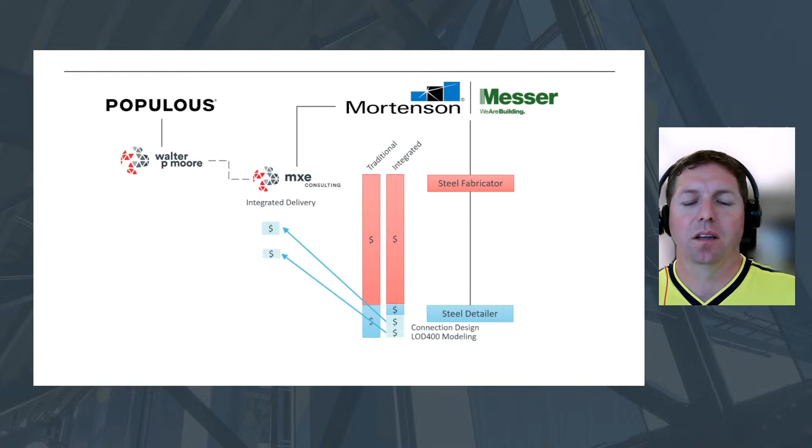And the best part about it is it's really allowing our trade partners to be comfortable and ensuring that there's clarity in what they're signing up for, allows people to sharpen their pencil, right? They're not putting additional contingencies in. They're not hedging their bets. It allows people to be very confident in what they're proposing on, and we can have the same confidence in hiring someone.

And really, the stat that drove it home for us was for change orders, we're at about 2% of their contract value at the end of the day, which is almost unheard of for steel, where it's not out of this world to be 10 to 15%. And so we're really proud of that final result. And to Justin's point, there still can be change, but the ability to manage the change and have a discussion when there's that level of clarity is very simple. It's factually based. You can move through the change order process quickly and without emotion. I think that really paid off on this project.

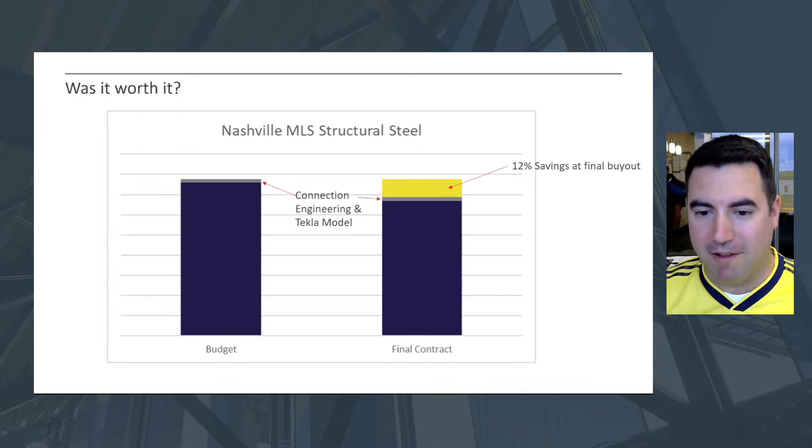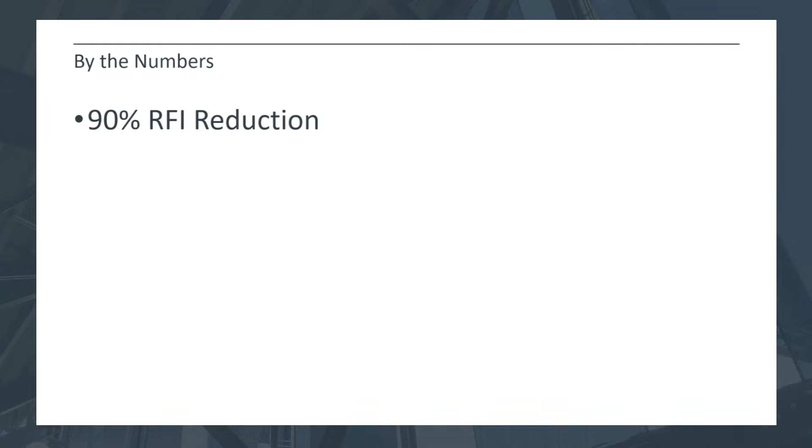Yeah, and a few other ones. Like I said, the RFI reduction process, we were down 90% of RFIs compared to what we've seen on other projects of this similar scale and complexity. The 12% steel buyout savings, 4 weeks leading to 7 weeks. Bruce, you want to talk about that?

Well, yeah, it was a shocking thing. How often do you get on a large project like this, and then towards the end of the project you get called to a meeting, and hey, gang, we're gonna open this project up 7 weeks before scheduled delivery. I was ecstatic, and I can imagine from the owner's side getting that news of, wow, I get the building 7 weeks sooner. I can start earning revenue on this building 7 weeks sooner.

It goes on and on, the benefits of what we were able to achieve here by using this delivery method, and this was one of the main reasons we were able to get there. So if I missed something, you guys feel free to add on to my story. Yeah, you're good. I think steel finished 4 weeks early, which is a pretty major accomplishment itself. But getting the critical path pulled up that far, and I think Justin talked about unintentional consequences, but that momentum carried through the rest of the trades. And so we're able to, to your point, Bruce, keep the cadence up and turn it over 7 weeks early, which is something we're proud of as a team.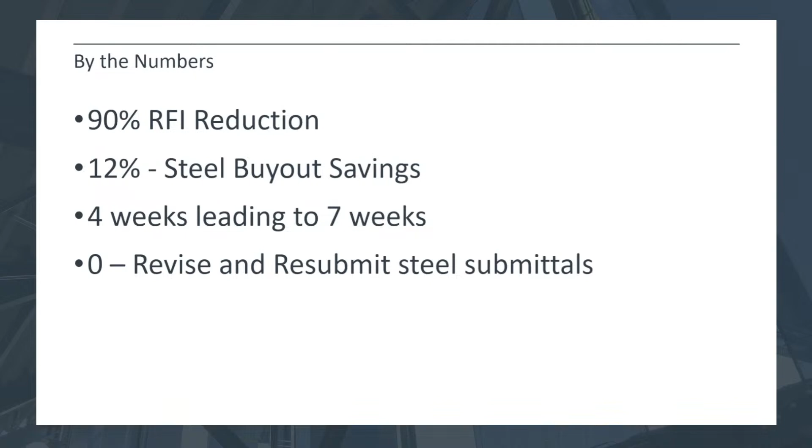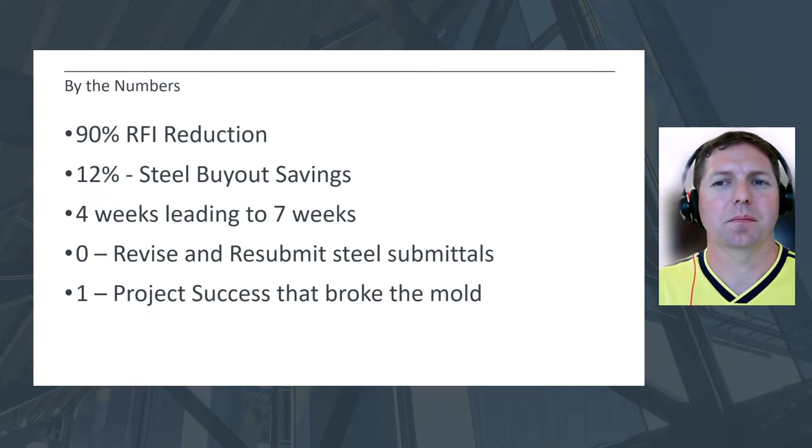Yeah, and one other stat that kind of blew me away was 0. We had 0 revise and resubmit steel submittals. This is the first and only project in my career where not even one steel submittal was marked as revise and resubmit. So, just showing the clarity of the process, and ultimately, going back to our theme of breaking the mold, right? It was one incredible project success for all of us involved. Yeah, to me, the question, after seeing all of this, shifts from did it work to why wouldn't you do this on every project.

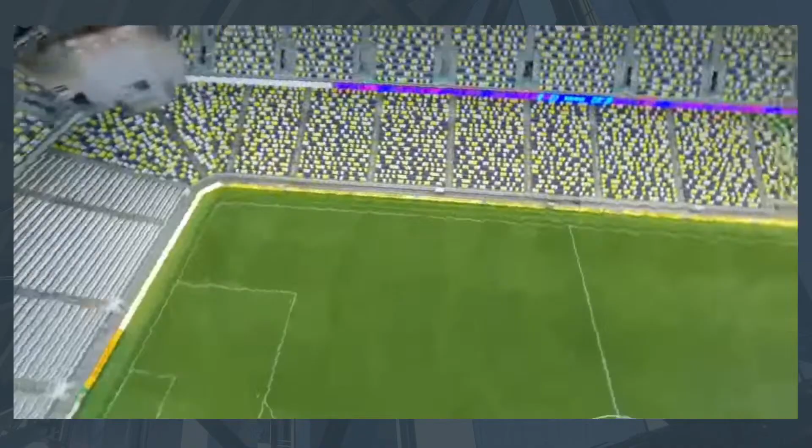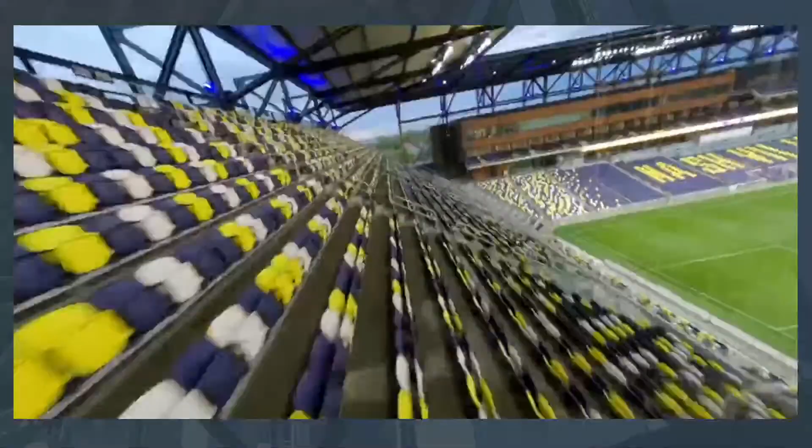I'm not seeing any questions here, so... All right, we're efficient. I think we have covered it. So I have a question for Taylor. Uh-oh. Yeah, answer it if you can.

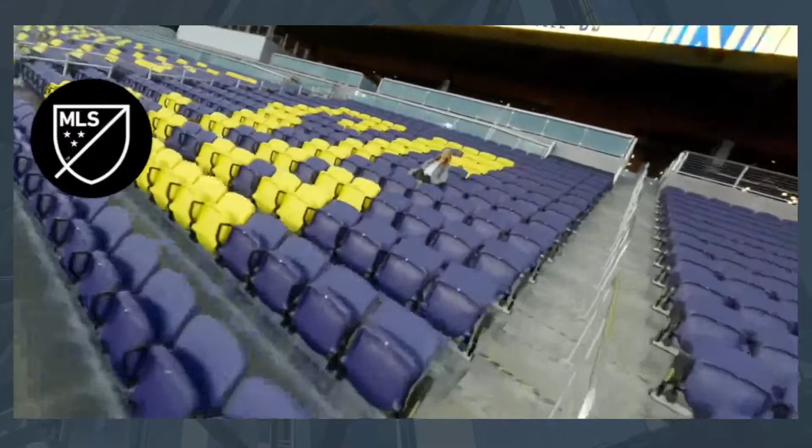I'm curious, how was this process received by the steel trades on bid day? Awesome. Yeah, I think that's a good question to bring up, Bruce. So before we actually implemented this, as we were getting budgets throughout design phase, we were presenting our proposed procurement method to all the parties who were helping us to budget the job, right? And we received some mixed reviews along the way, I'd say.

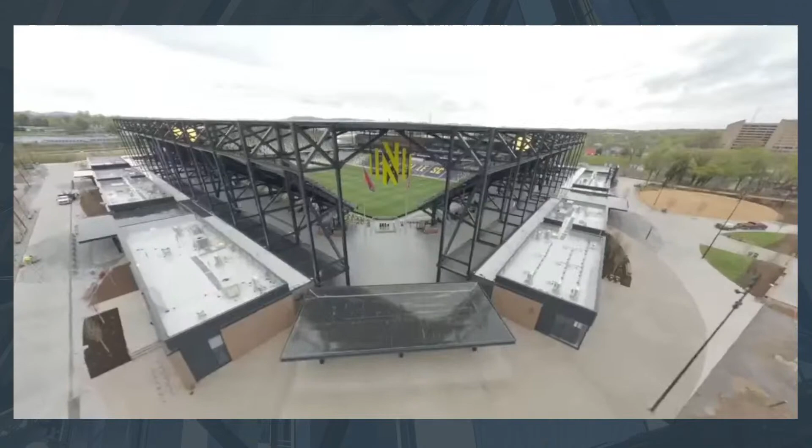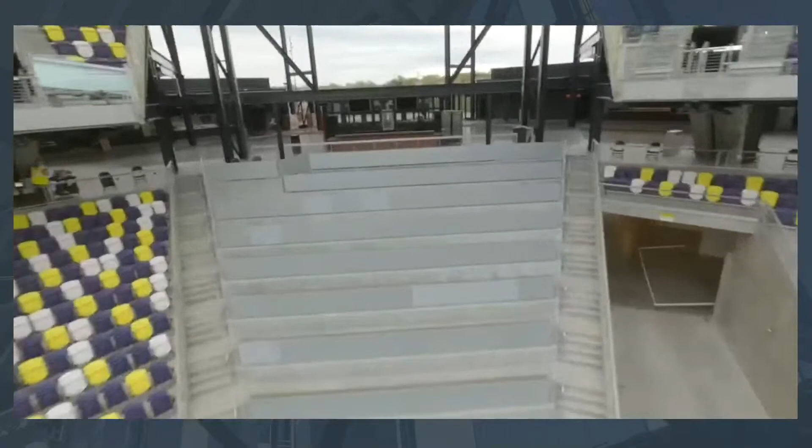Part of it is control, and so I think some of the fabricators we talked to, including Lejeune, who we selected, were hesitant at first with all this being pulled up, right? Because there's a concern on how are you able to impact the design and make it so it's favorable for their shop's fabrication. And in the end, after going through this process, they couldn't have enjoyed this more. I know for them, this was a very smooth and productive effort. I know they're looking forward to doing this again, and other trade partners are.

So I just think that trust piece is huge, and having a little faith in each other, as hard as that can be in the world we live in, really makes a big difference. Yeah, that's good to hear. Good question. I did get a question here on the chat from Christopher. Were there any specific trades that benefited from this delivery besides the steel team?

Justin, you can answer after, but I think one of the other items that was huge was the ability for all the other trades to coordinate through VDC was massive. And so you think about, we had this model before we were really even in the dirt working, right? So the coordination for all the successor trades had a model that's far more accurate than what we may have had historically on other projects, and we're able to better coordinate and plan their work. And I think that's one of the ripples we felt throughout the successor trades.

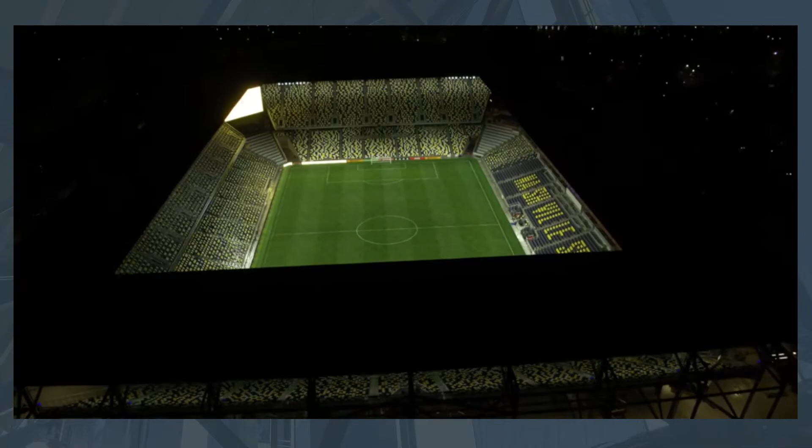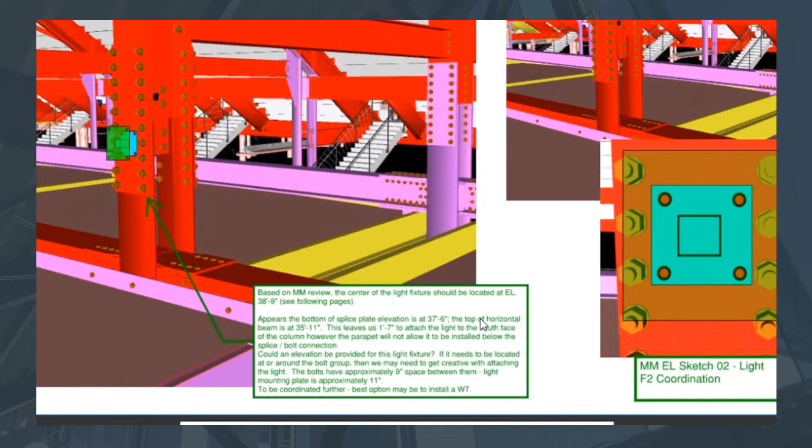Little things like that I hadn't necessarily thought of, but again, having that sooner allowed everything else to be able to move forward, and the coordination that was waiting to happen until a month before that material was going to be on site, now could happen 3 months before it was on site. So again, as Taylor said, that led into being able to finish the overall job 7 weeks early. MEP for sure saw a massive benefit just with the front end heavy coordination they have. Great question. Great answer.

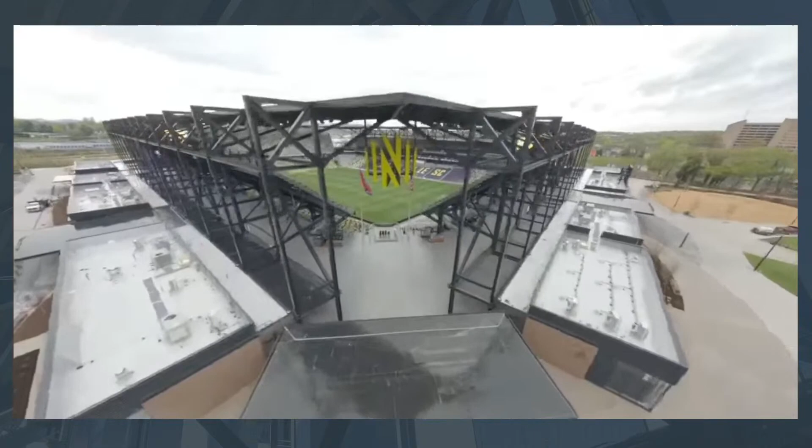Well, look, we certainly appreciate the opportunity to share the success here, what went well, some of the carry-on unanticipated ripple effects from this approach. I think there's a winner here. I think all of our firms would certainly say, and the owner would say, that they're proud of the work, they're proud of the end result. Really, a fantastic all-in-all project.

Another question here. We'll just keep rolling, from Graham. What did the steel approval packages look like? Was it drawings or model review? Oh, great question. I took this out because we were going to be short on time, so I'm glad you asked that. So we actually, again, continued asking, well, what can we do? What we had for the steel submittal review process was a combination: we had the 2D plans and erection sheets like you would typically have, but instead of having 800 pages of individual piece sheets, that part was reviewed in the model.

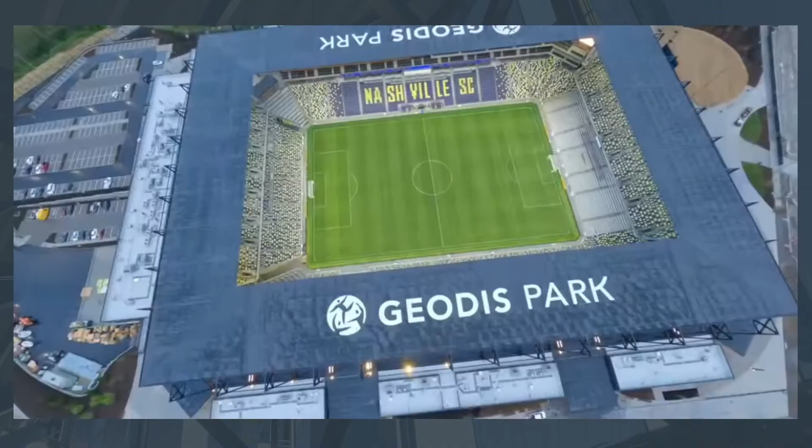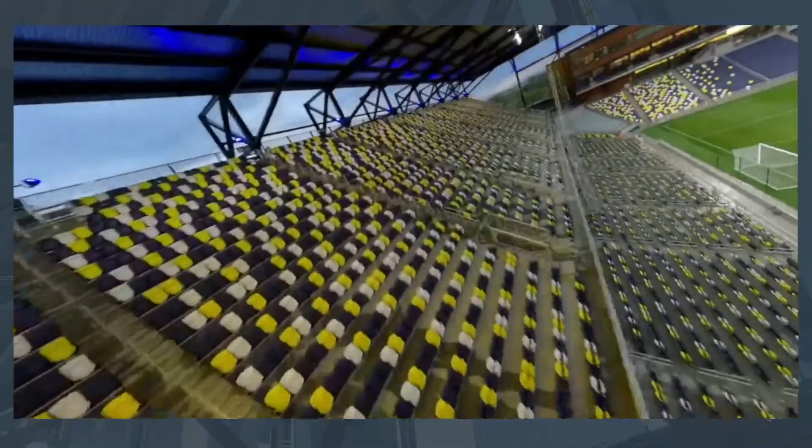And again, our engineering team, our connection team and our modeling team are all working together throughout the process, so we had a lot of confidence we could check various members. It saved the fabricator a substantial amount of time and effort in creating all those individual 2D fab sheets for each member, since those didn't have to be created and submitted. Instead, the detailer has a proprietary software that we can mark up in a 3D modeling environment to get different comments included in there.

So it was a combination of model review, but we still did have the plan review for some of the cladding edge bent plate dimensions. Those are a little easier to show on plan in a 2D drawing, as opposed to trying to show in a model and figure out, okay, what's the dimension of the bent plate from the center line of the grid? That stuff was a lot easier to keep in a plan document. That was a big discussion. It was. How do we document this appropriately, to ensure that we're fulfilling our commitments for reviews, but not just creating duplicated effort?

So yeah, and I looked it up. I think we had 150 steel submittals on the job, and about 50% of them were returned in 3 days or less. And I think our average was about 6 days. So again, it made the process so much smoother, and we did count on some of that time savings. And honestly, some of the ones that drug us down a little at the end were smaller submittals that we maybe didn't prioritize and turn around as quick as we could have. Honest.